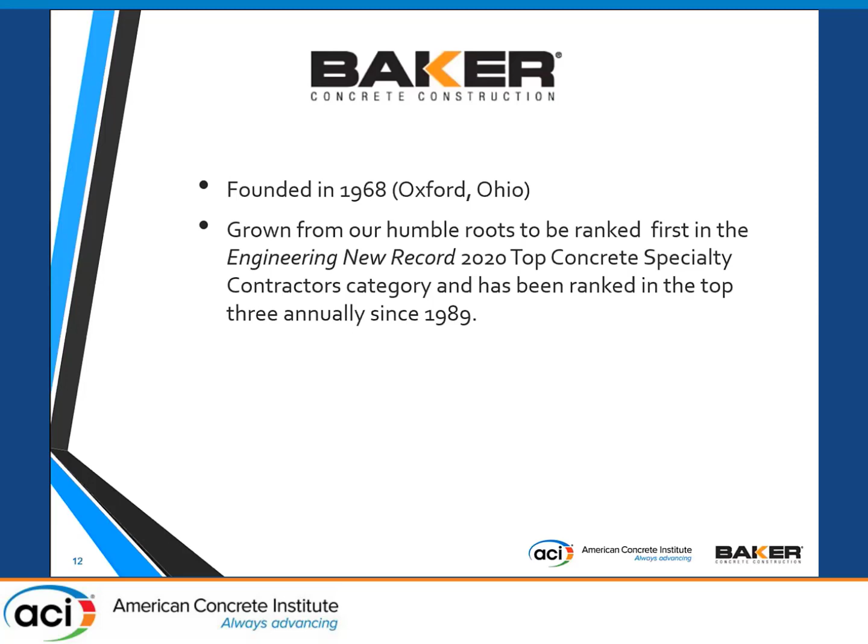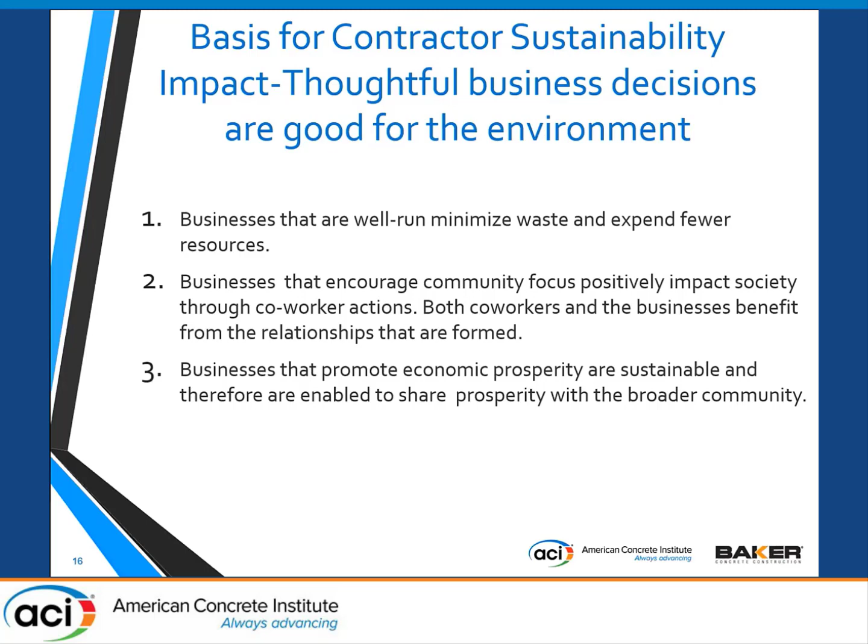There are three basic principles that define what sustainability means to us. First, a well-run business is good for the environment. Second, our business must be engaged in our communities. And third, our business must promote economic prosperity for our business itself, co-workers, partners, and the community. The sustainability model includes three realms: environmental stewardship, or caring for the earth; social responsibility, caring for our communities; and economic prosperity, financially sustaining our business, co-workers, partners, and communities.

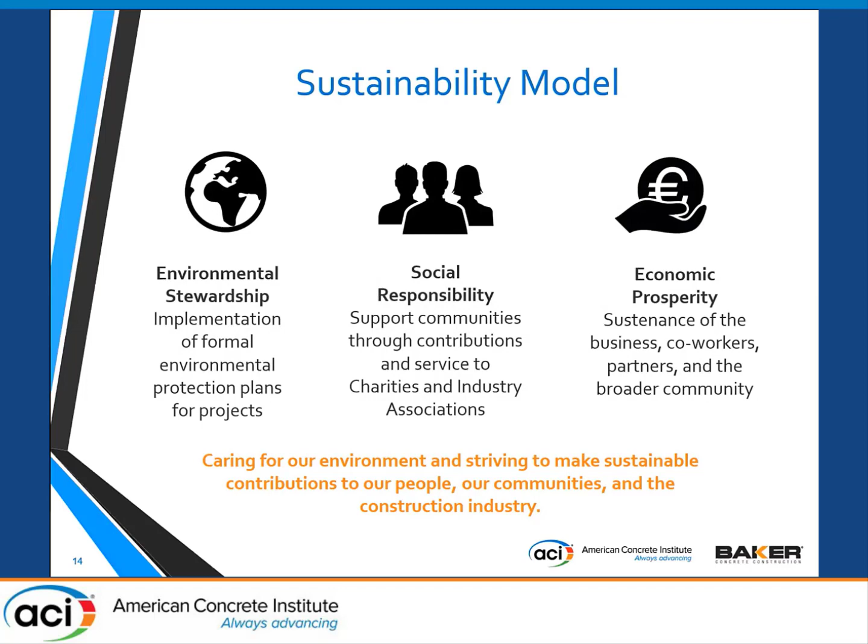The topics on this slide may sound like blue sky ideas, something you might read on a glossy 10K report, but these are the three policies that drive sustainability for us. The remainder of my presentation will focus on converting these blue sky ideas into practice. While we still have much to do, we're working on each of these areas.

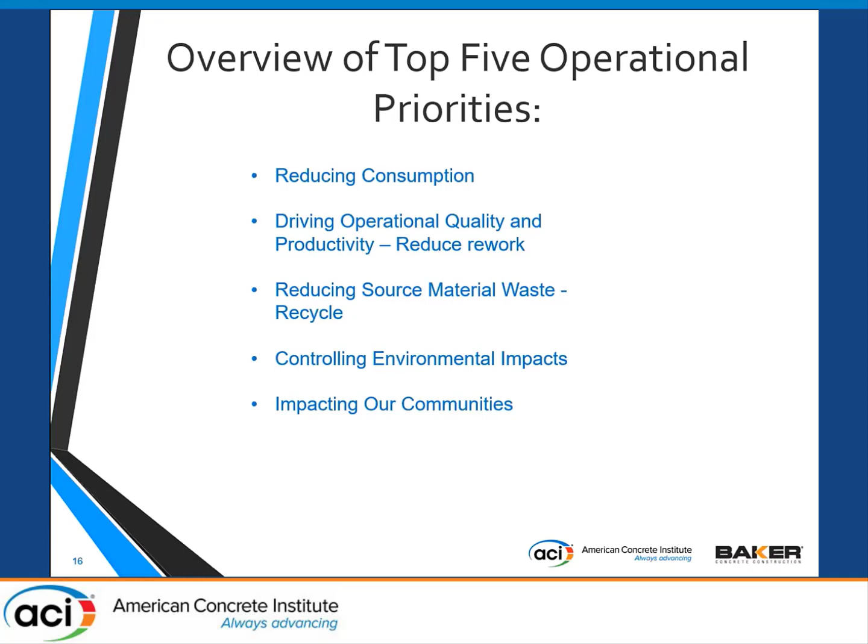Fourth, implementing site environmental control plans that include stormwater pollution prevention, concrete washout plans, equipment product VOC emissions controls, spill protection, and in sensitive areas, endangered species and archaeological controls. And finally, we're not measured only by the structures that we build, but also by the impact on our communities.

The first priority considers consumption. If we consume less, we help the business and the environment. By example, installing LED lights and motion switches in our warehouses and offices has greatly reduced the energy that we use and our cost. Another example: sending concrete back to plants is not good for the environment or our bottom line.

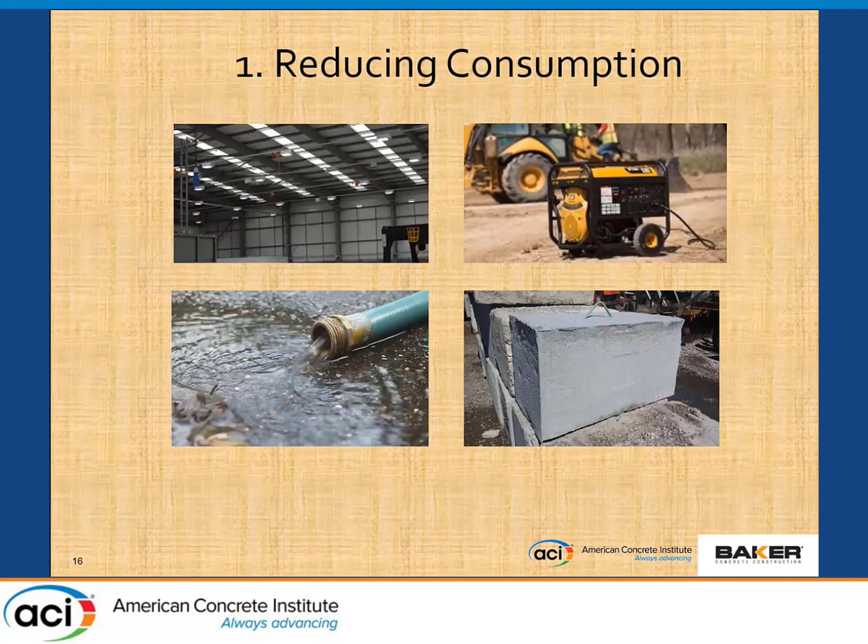In 2018, 350 million cubic yards of concrete were produced in the U.S. It's estimated that 5% was either wasted or returned to the plant. This waste constitutes 17.5 million cubic yards of concrete, 8 billion pounds of cement, and approximately 4 million tons of CO2 generated from the production of cement alone.

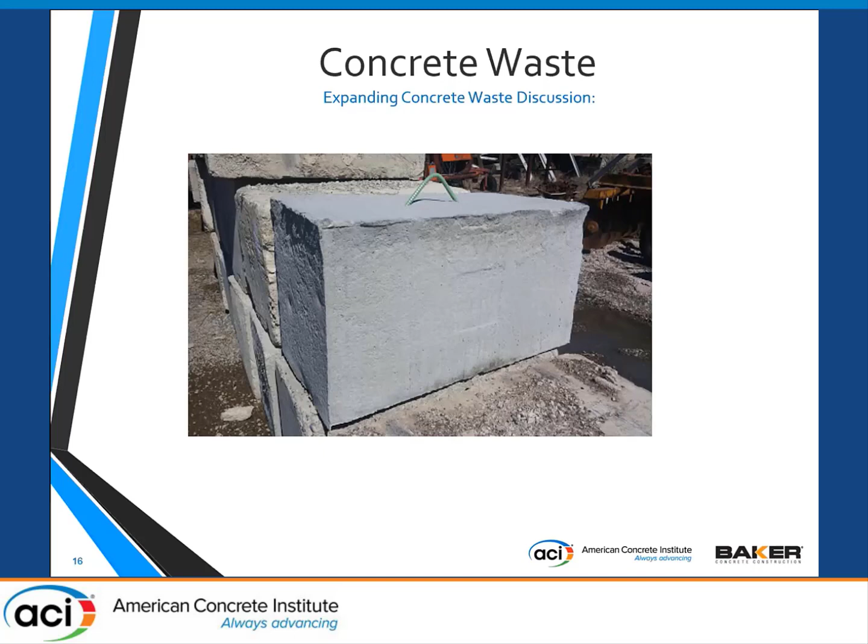Second, a Colorado Ready Mix Association study determined that initial curing of cylinders was performed properly only on half of project sites. Improperly cured cylinders can lead to 20% strength reduction in test results. Considering the same 350 million cubic yards of concrete and improper curing of cylinders leading to reduced strength, another 28 billion pounds of cement are needed and 14 million tons of CO2 generated from cement production.

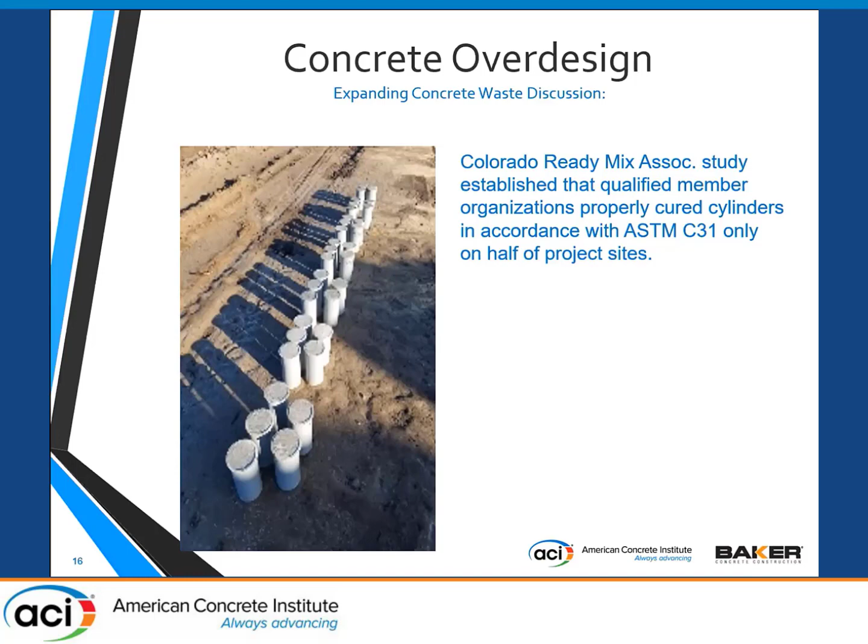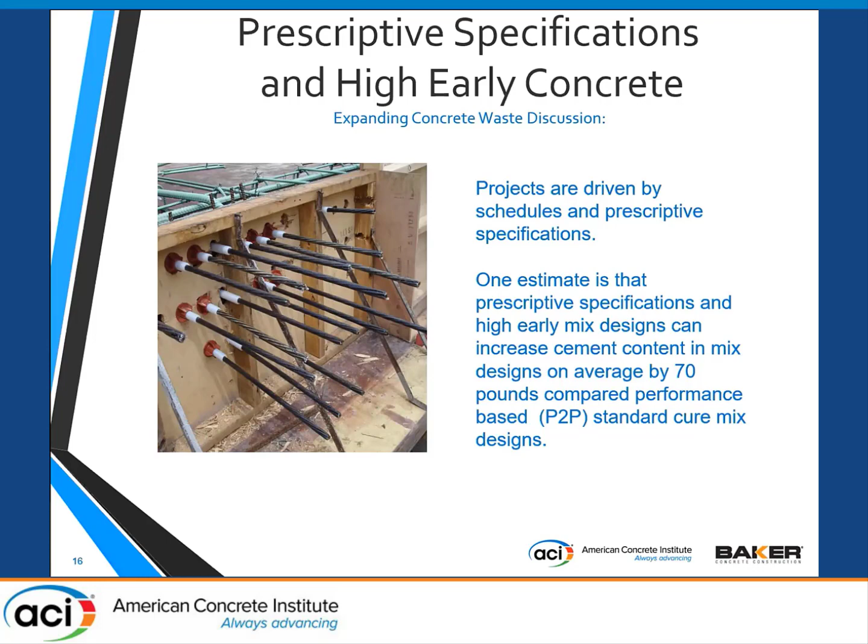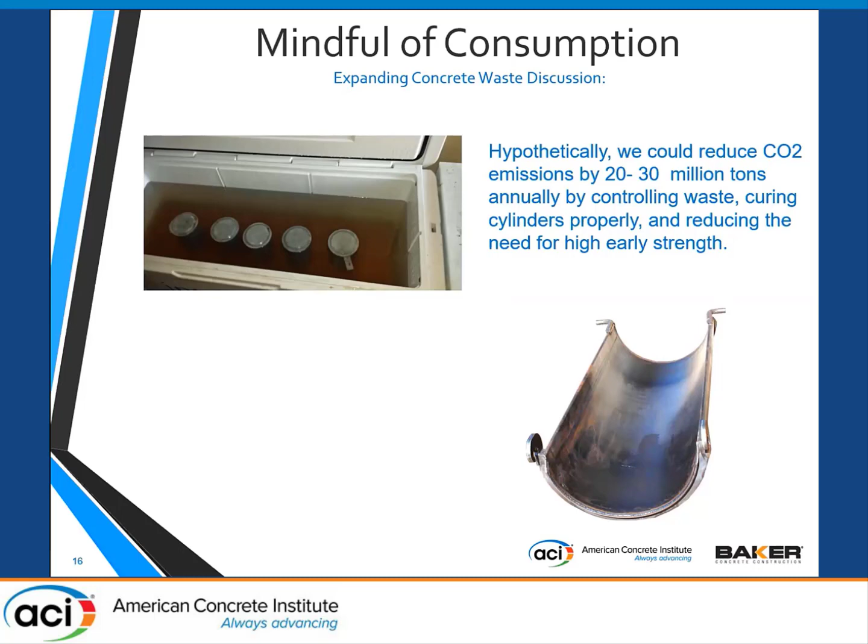The third example, projects are driven by schedule and in some cases overly conservative prescriptive specifications. Again, if we take the 350 million cubic yards of concrete, add 70 pounds of cement to each yard, that's 24.5 billion pounds of cement and 12.5 million tons of CO2 produced. Hypothetically, we could reduce CO2 emissions by 20 to 30 million tons annually by controlling waste, curing cylinders correctly, and reducing excess cement content in mixes.

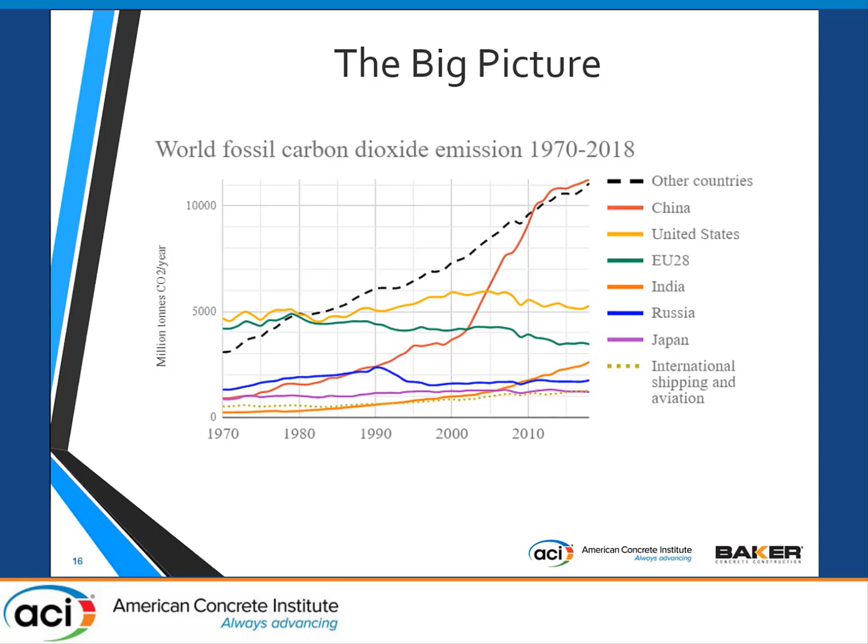Putting it in perspective, not to be deflating, but annual CO2 emissions in the U.S. are approximately 5 billion tons compared to the 20 or 30 million tons that could be reduced as shown on the previous slide. With that said, it all adds up. We have to start somewhere. Current CO2 emissions levels are truly death by a thousand cuts, and every act of green supports reduction.

While using cleaner fuels has been challenging in some circumstances, it's easy to implement: turn it off when you're not using it. How many times have we walked by a generator running with no one on the end of the power cord, or observed lights burning with no one in sight? It's not good for our business or the environment.

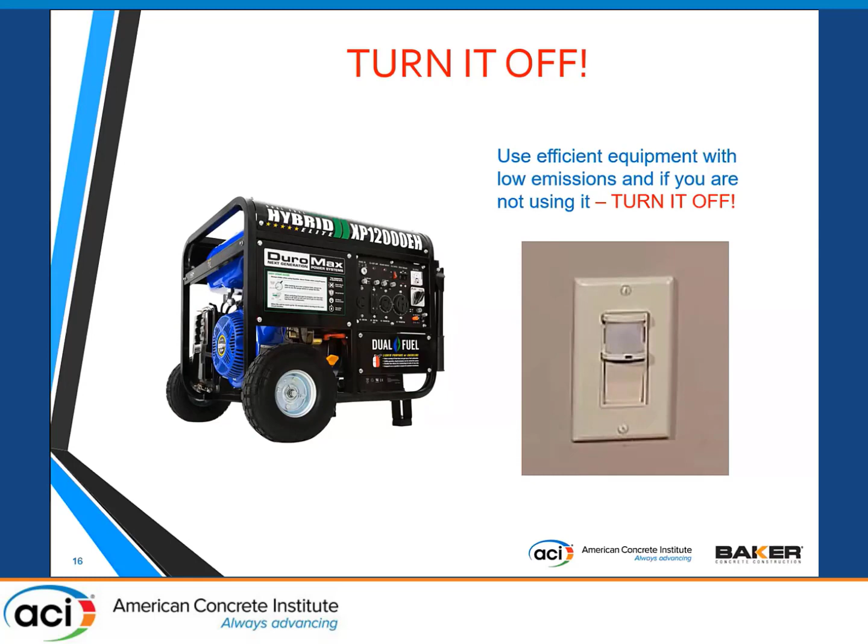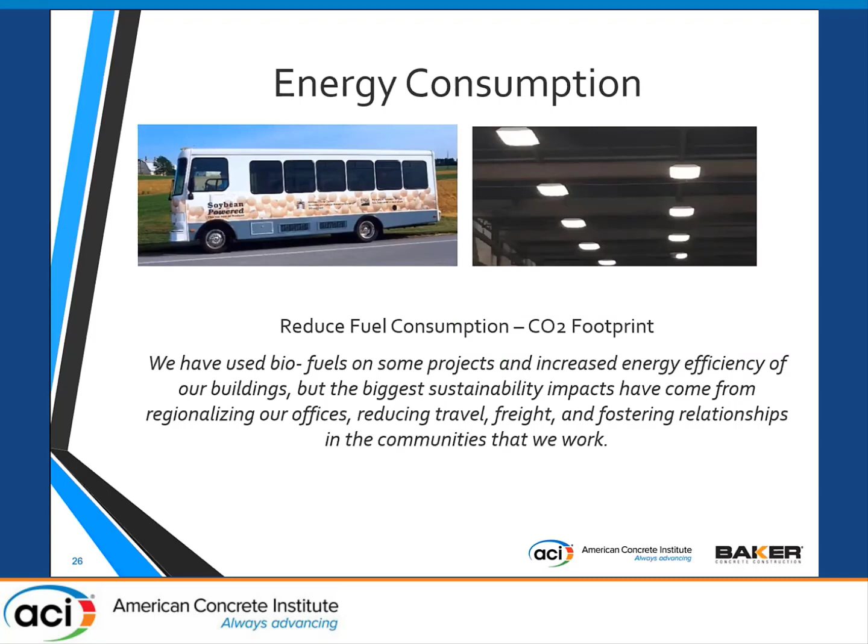We found ways to use eco-friendly fuels and reduce consumption, but the biggest impact has probably been from regionalizing our offices. Bigger regional offices reduce energy use and emissions from travel and shipping. Regionalization improves lives, reduces costs, reduces the impact on the environment, and positively impacts the communities we serve. We still go to where the work is, while regional offices support better service to our clients and communities and a reduction in transportation impacts.

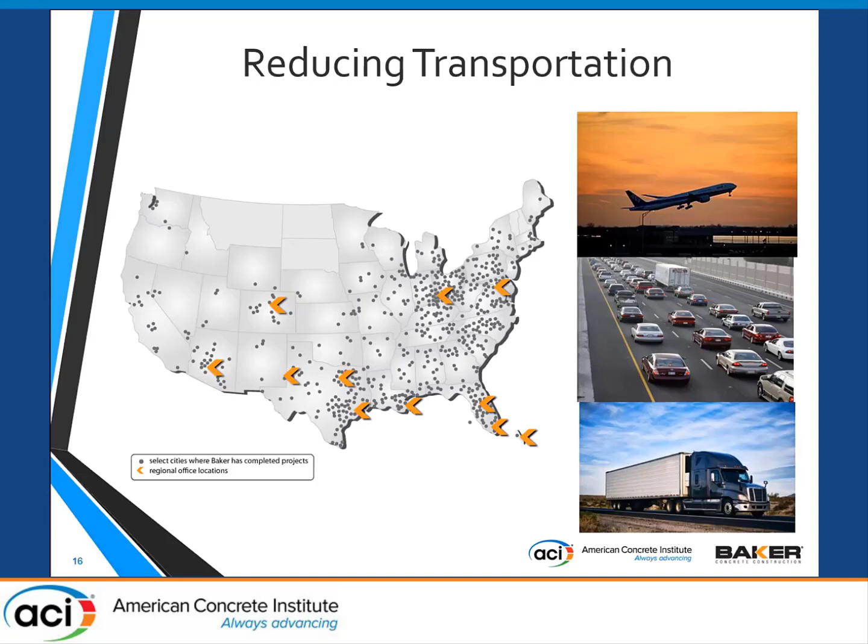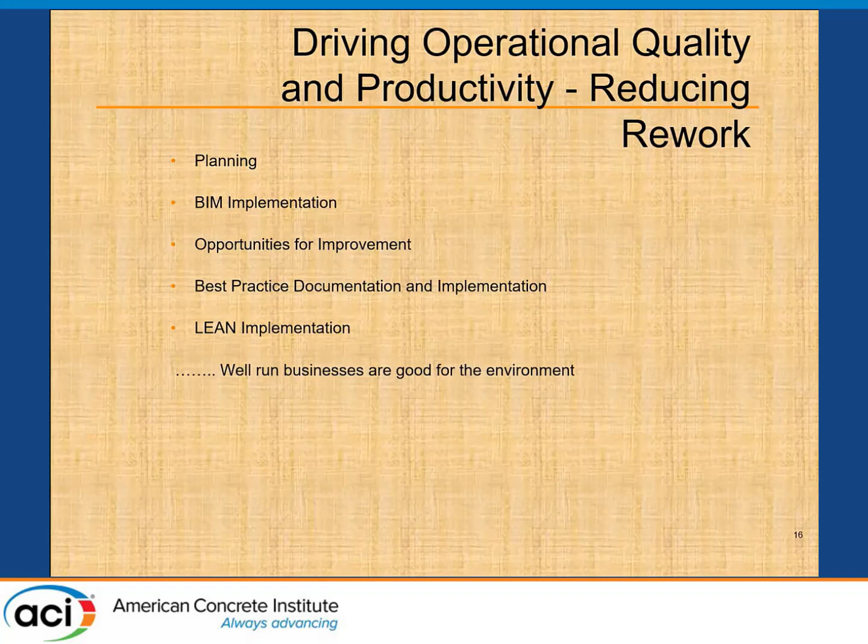A second priority considers operational quality and productivity, doing things right the first time. Elements of operational quality and productivity include planning, BIM implementation, opportunities for improvement, best practice documentation implementation, and lean implementation. I'll go through each of those.

Baker implements four phases of project execution, from early conceptual design to construction execution. On a recent project that was fully designed by a developer, we supported a redesign that cut $3 million out of the cost of a $28 million concrete project. Building smart is good for the environment.

Implementation models are used to identify errors, clashes, and assist with visualization, planning, and documentation of as-built conditions. Having pre-placement as-builts prior to placement greatly reduces rework and impacts on the environment.

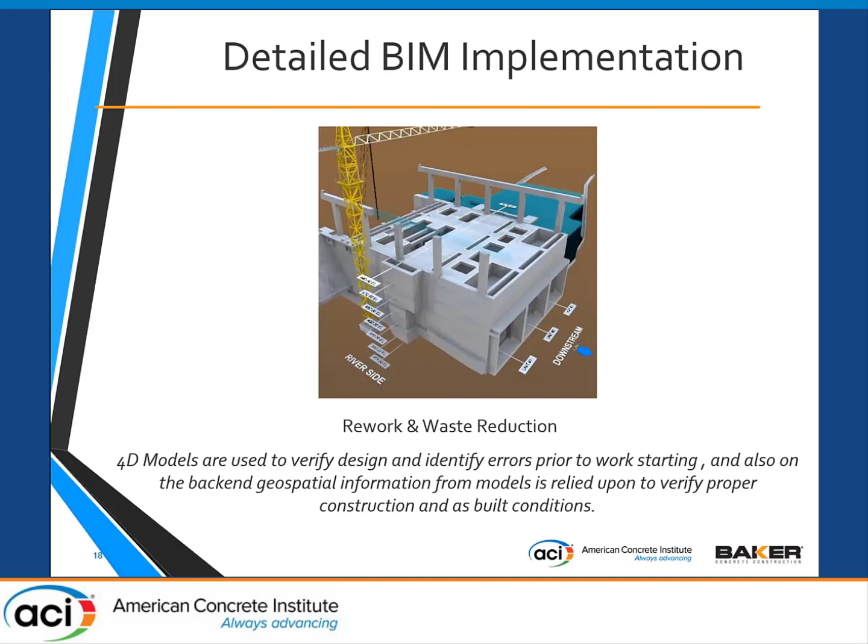Baker leverages mobility apps and enterprise content management software to reduce rework. These mobility apps are used for connecting frontline coworkers with iPhones and iPads, processing event reports, trending those event reports, determining needs for corrective actions, and finally documenting and improving practices.

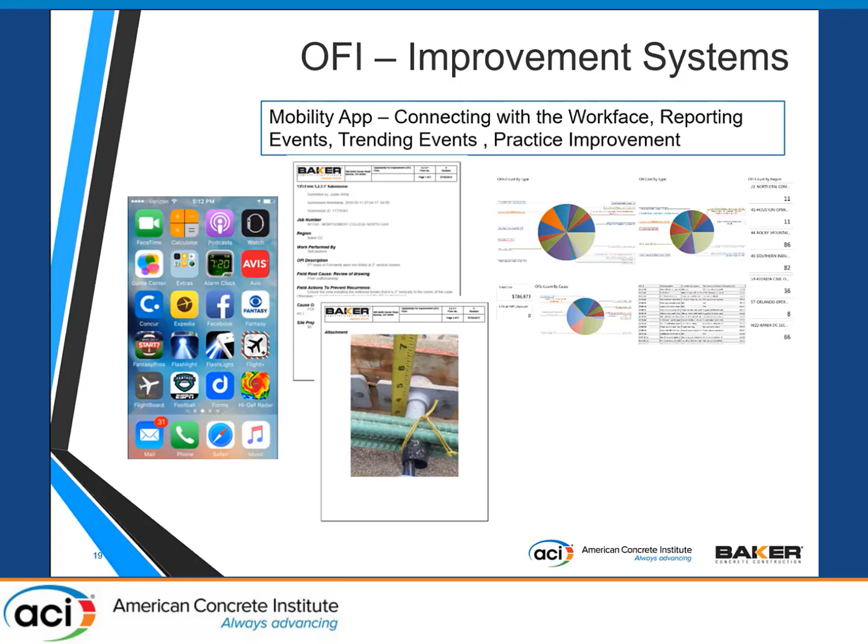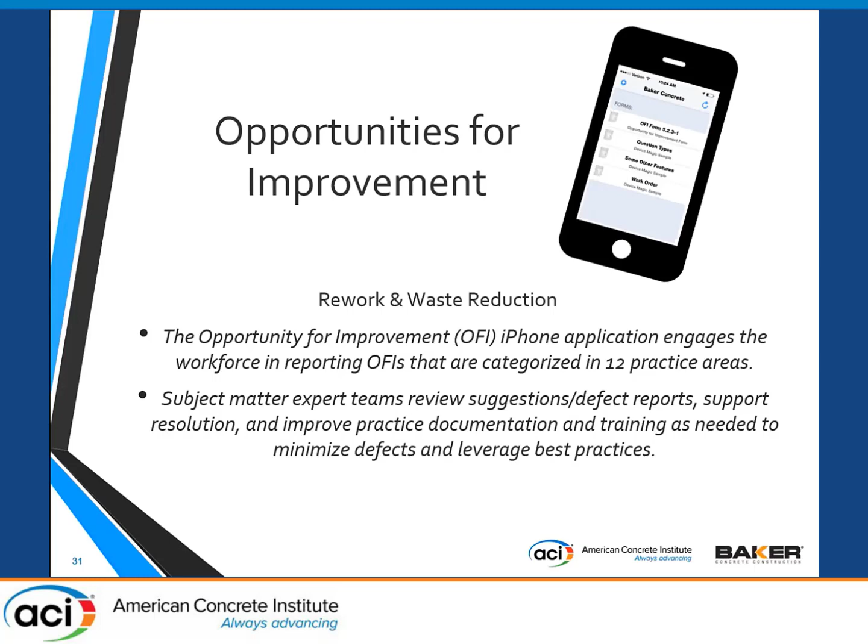The OFI process supports both event reporting and trending, and idea management. It's used each month to evaluate needs for practice improvement. Each month we implement or revise two to three of our construction practices. This is the end game of the OFI process. Improved practices lead to a better run business that reduces impacts on the environment.

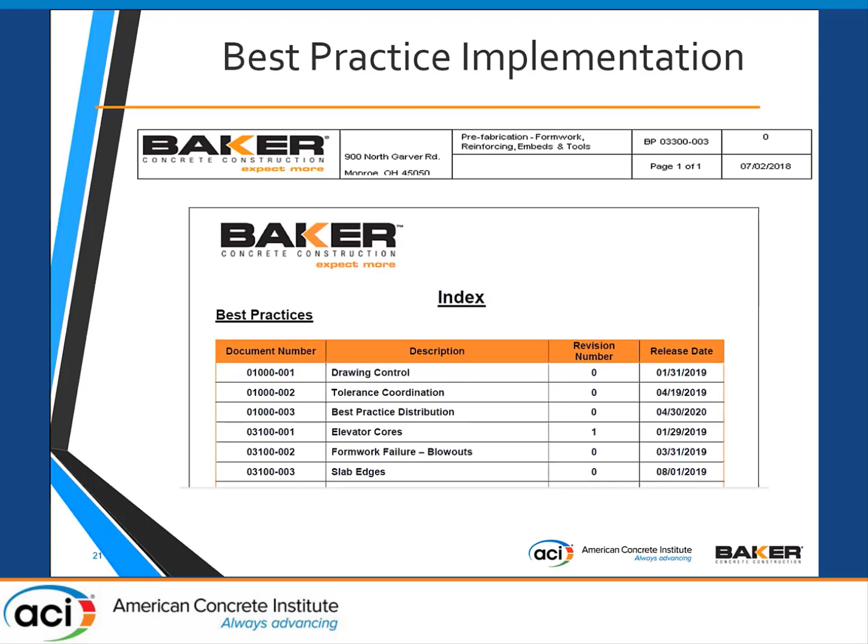What CII refers to as activity analysis includes review, analysis, and continuous improvement of everyday activities and processes as needed to reduce waste. Implementation of lean construction techniques greatly reduces waste on our projects.

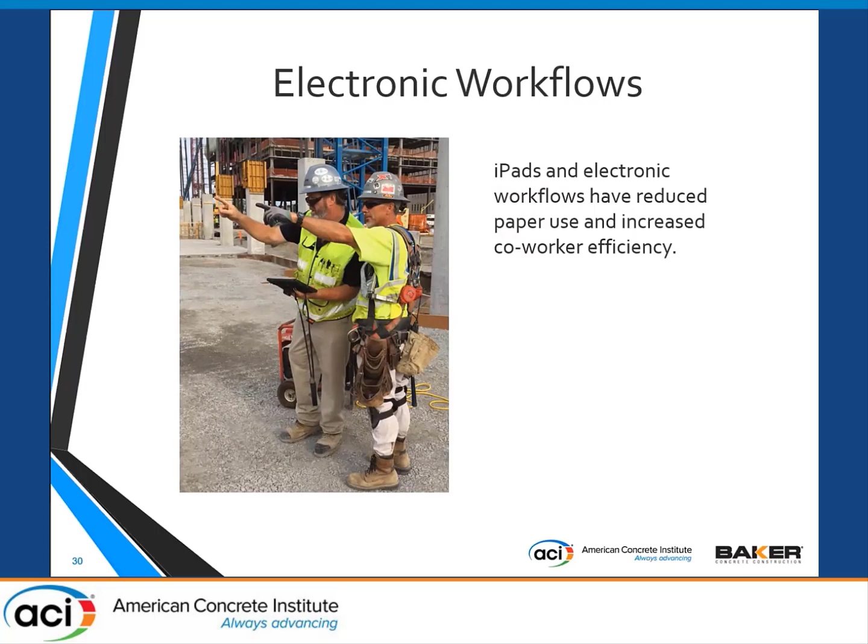Shuffling dog-eared pieces of paper is still alive, but on many projects we're implementing more advanced tools to manage documentation. On one nuclear project, over 2 million pages of records were processed electronically.

The third priority is reducing waste and recycling. We support this through our internal programs by working with client programs to recycle many things, including rainwater.

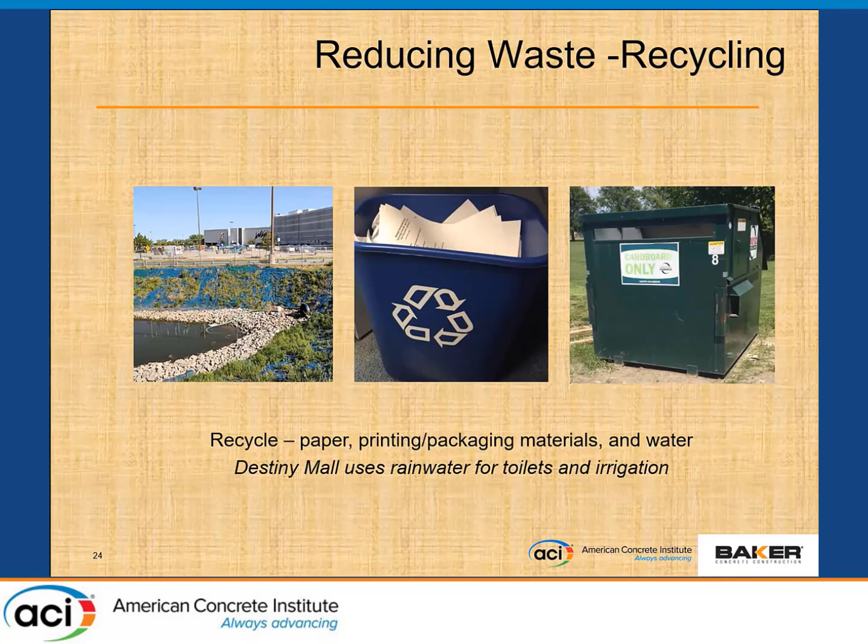Recycled content in the supply chain reduces environmental impacts. In the Cincinnati region, much of the rebar that we use comes from recycled railcar axles. We also use recycled concrete in several markets.

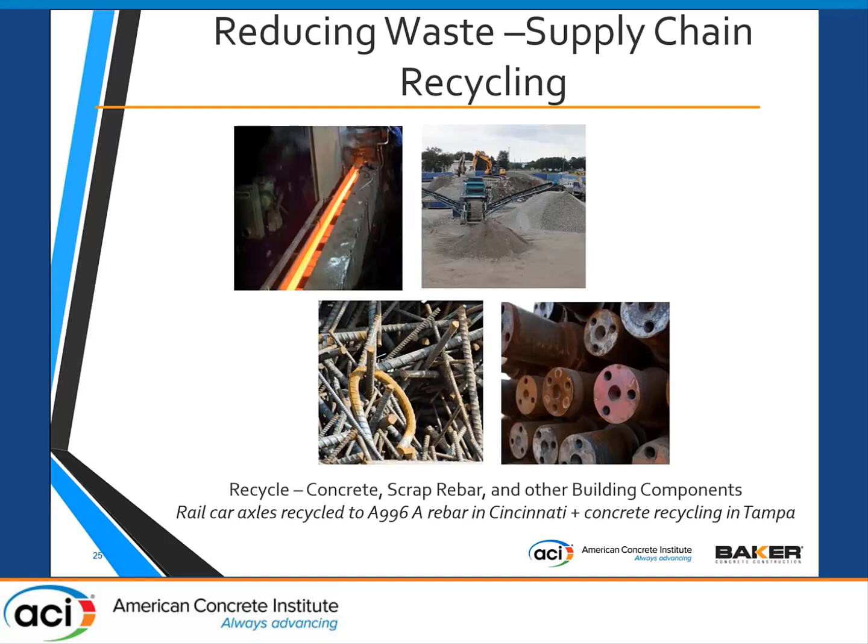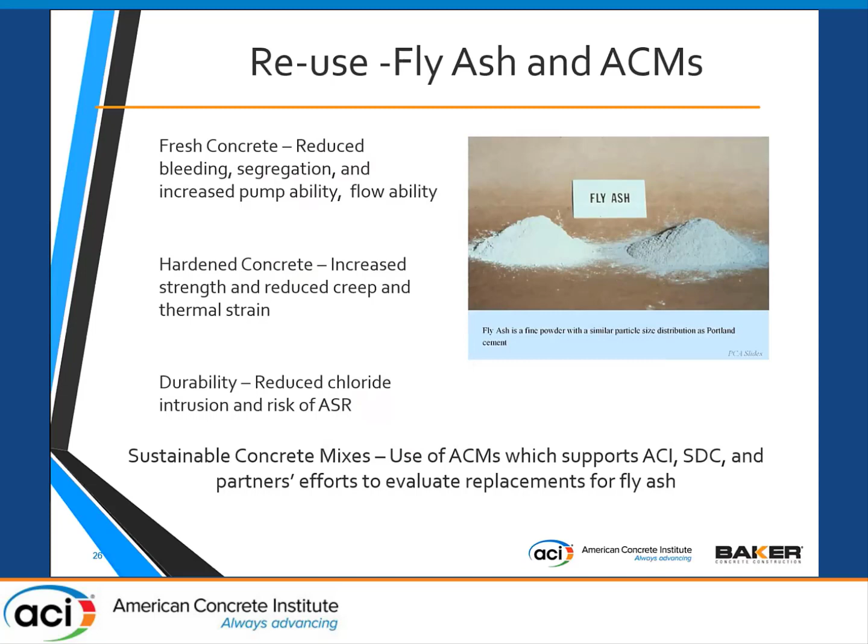Of course, the use of fly ash and alternative cementitious materials are good for the environment. The use of ACMs reduces the amount of CO2 produced, and in many cases improves durability.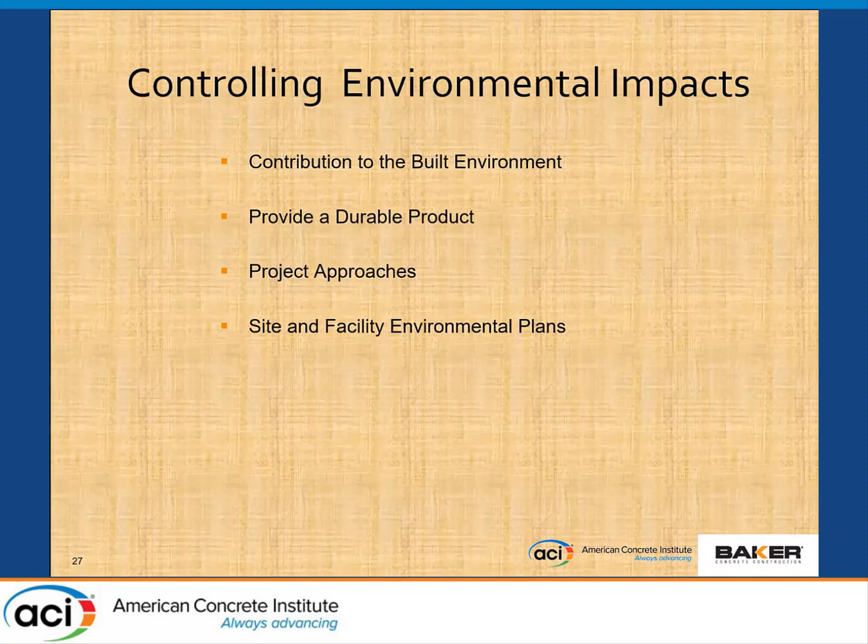Fourth priority is control of environmental impacts. This is managed through our contribution to the built environment, providing durable and resilient products through project approaches and product selection, and finally through implementation of site-specific quality control plans and environmental control plans.

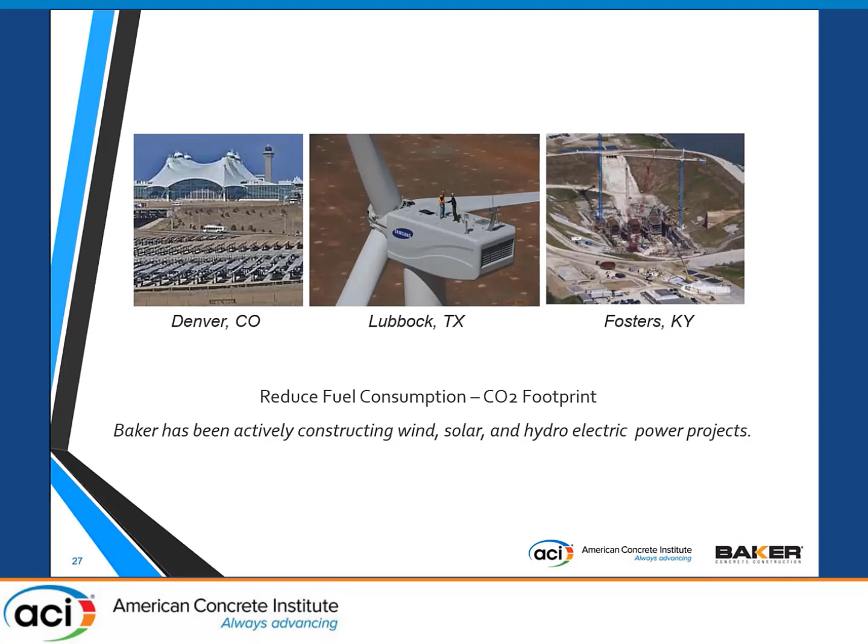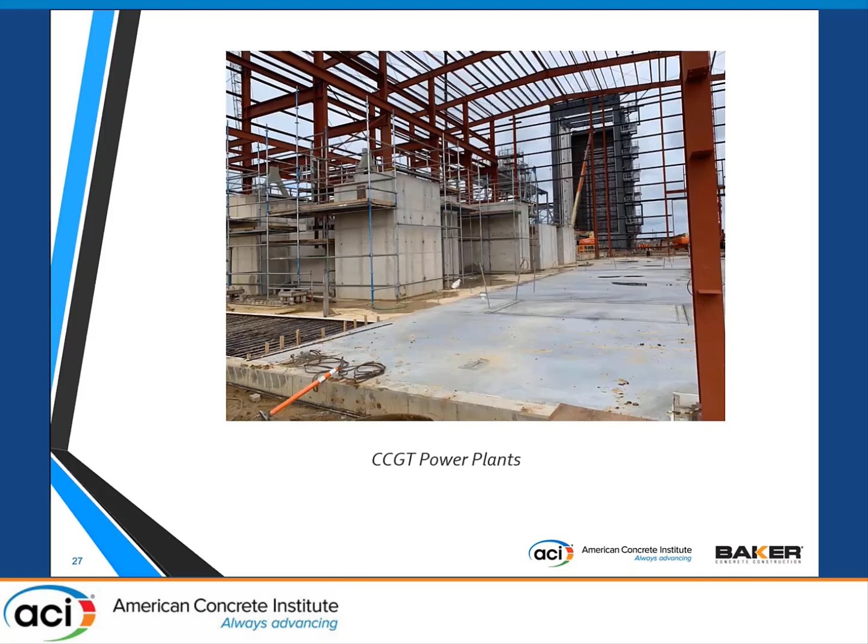We've been fortunate to participate in several clean energy projects: solar, wind, hydroelectric. We also have built several combined cycle gas turbine power plants. These plants balance financial and environmental considerations. I think they're a good example of the three-legged stool that Larry mentioned. They're economically viable, and they're much better for the environment than burning coal. They're not talked about a lot in political circles because they're in that middle.

Possibly one of the biggest benefits of concrete is resilience of the product, resisting fire, wind, storm surge, and earthquakes. The Pantheon's one of my favorite examples, still standing after almost 2,000 years. Did you know that it burnt down twice before being built from concrete in 126 AD?

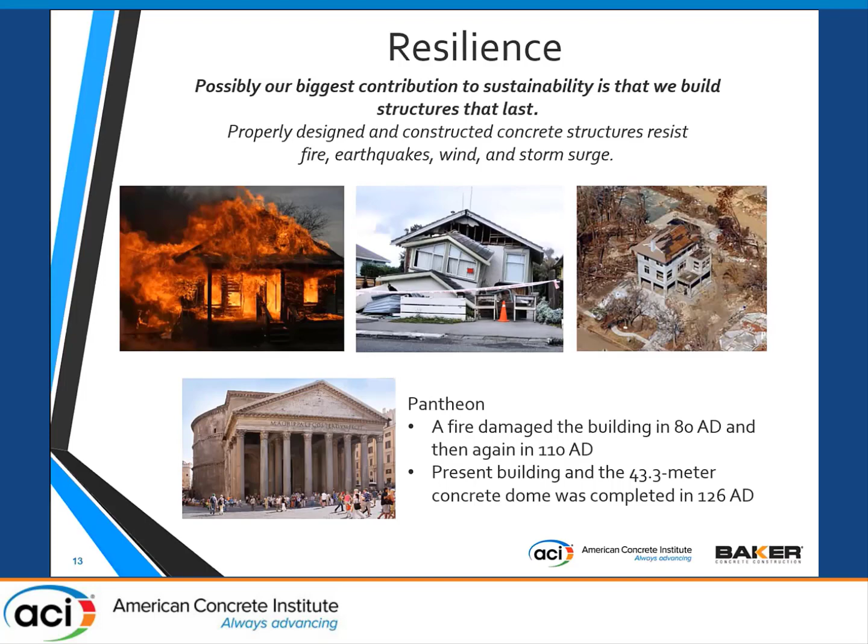Several of the materials and choosing repair over replacement benefit the environment. These photos are of a garbage plant tipping floor and pervious pavement at the Baker offices. So the materials we select and the methods we choose to approach projects can reduce our impact on the environment.

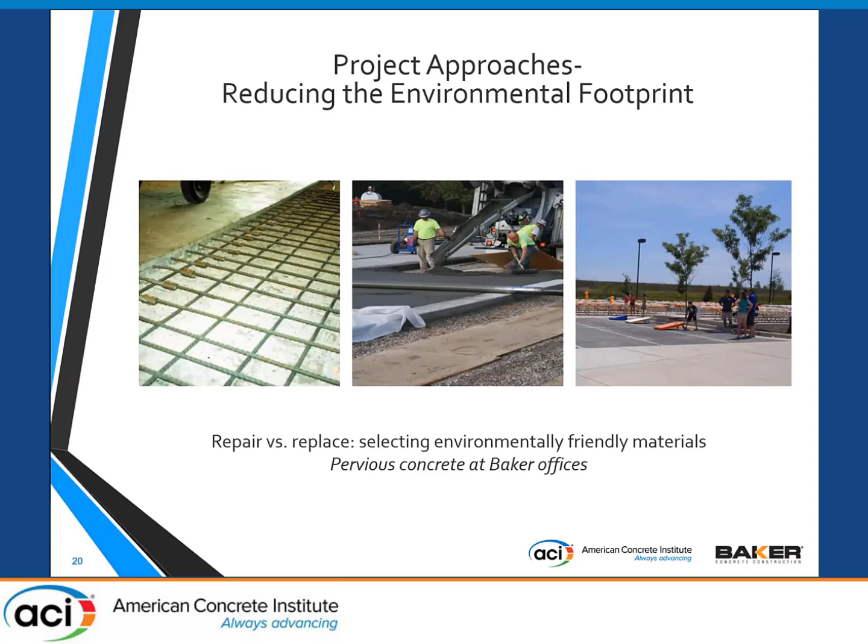Formal implementation of environmental control plans for projects supports reducing impact. This slide provides a basic outline of what one of our project environmental protection plans might look like.

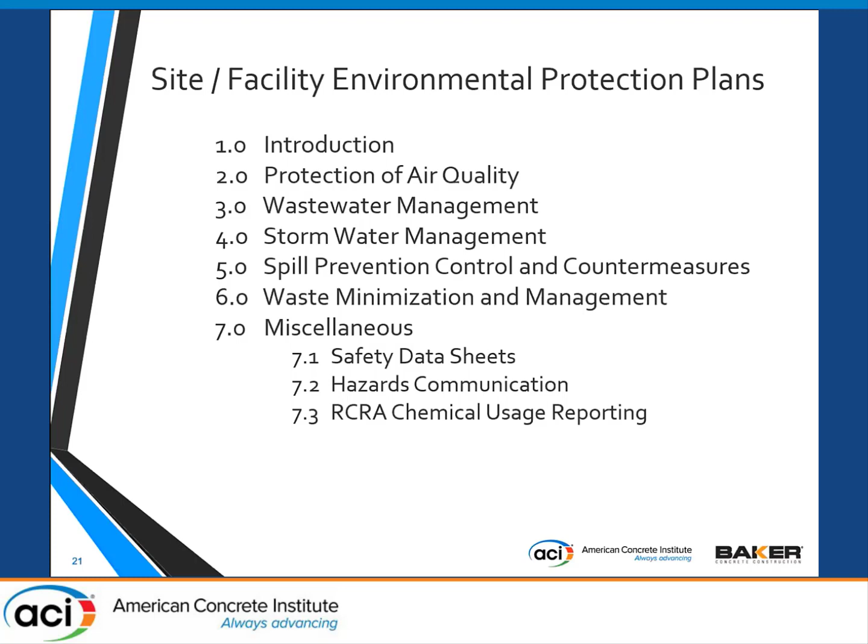The fifth priority relates to coworkers and community. Baker's a large organization, but still a family business. This is evident in the way that we support coworkers, communities, and industry associations.

For our coworkers, first and foremost, it's a safe place to work. In addition, recognition of service awards, birthdays, wellness programs, and benefits reinforce our commitment to the coworker. Mr. Baker does not have any employees, and he'll quickly correct you if you address our workforce as anything other than coworkers. For our communities, we're very involved in many nonprofit organizations: Make-A-Wish, Salvation Army, Boy Scouts, and many others.

Participation in industry associations helps raise the water for all of our boats and drives a more efficient industry that's good for the environment and for society in general.

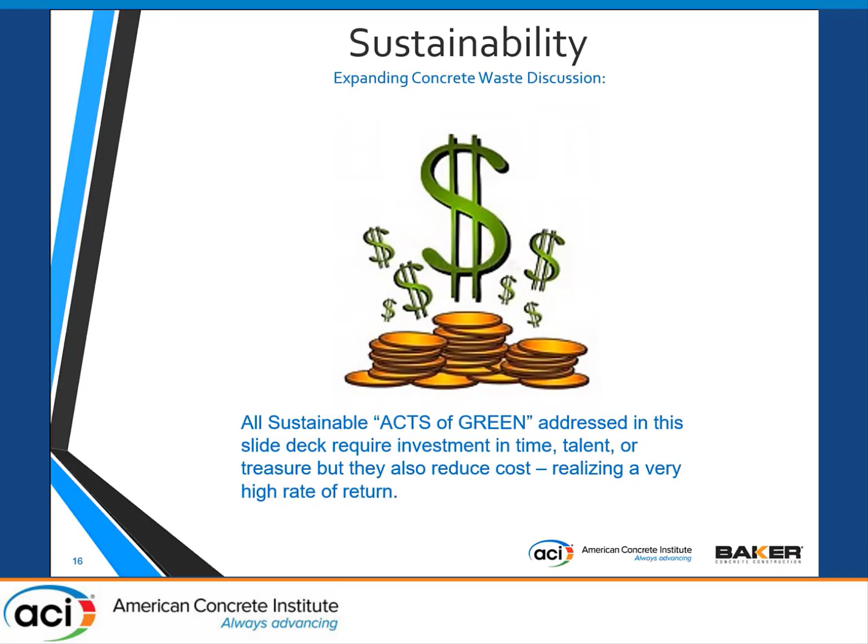Interestingly, all sustainable acts of green addressed in this slide deck require investment in time, talent, and treasure, but they also reduce cost. With a very low cost, the return on investment is very quick.

In summary, think globally, act locally. A well-run business is good for the environment. We are coworkers, partners, and community focused. It's really kind of a common sense approach to being efficient and being a good community citizen. That's what our sustainability program is about.